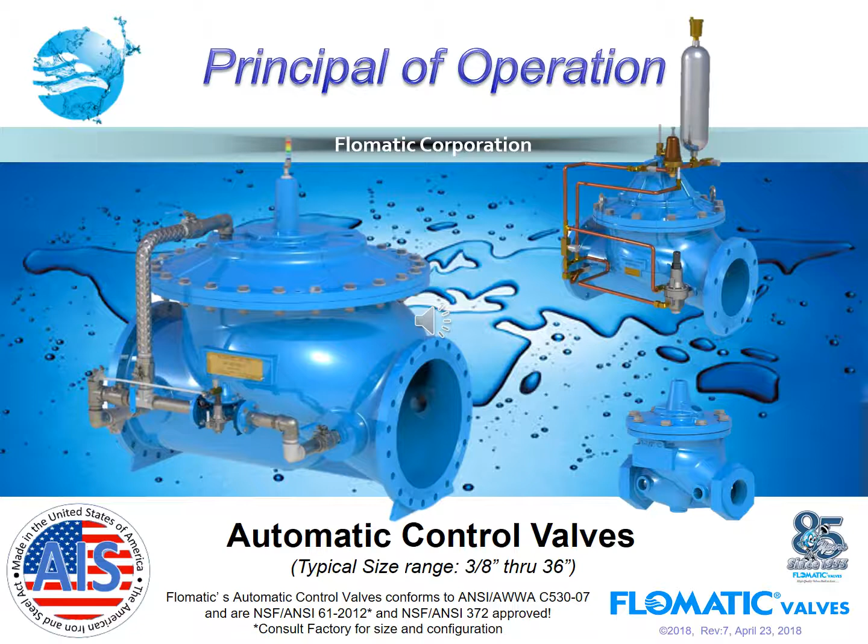Flomatic is very pleased to make this short presentation on our automatic control valve program, which is NSF ANSI 61 certified and also qualified under the American Iron and Steel Act, the AIS.

This short 15-slide presentation will explain how an automatic control valve works and what the component parts are.

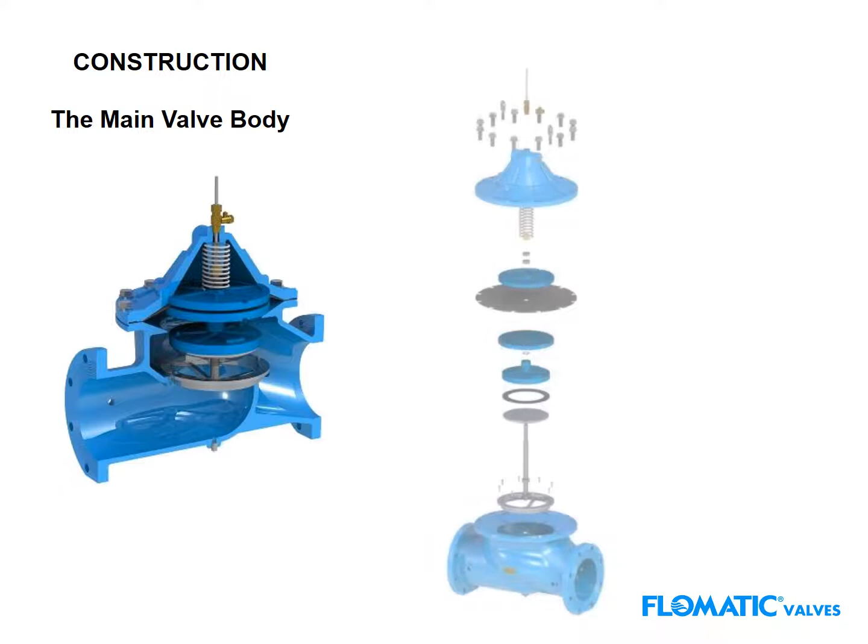The Flomatic automatic control valve has a very simple, reliable construction. It contains very few parts: top cap, spring, diaphragm plate, diaphragm, lower diaphragm plate, spool piece, rubber valve seal, valve stem, valve seat, and a fusion epoxy valve body.

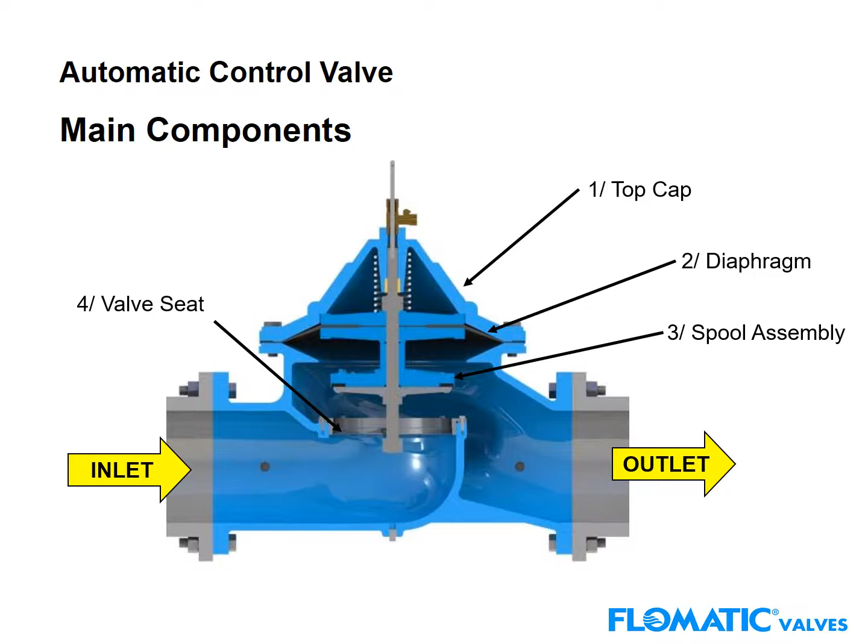That meets NSF epoxy requirements. The main components of the valve are an inlet portion and an outlet portion, a top cap or power chamber, and the diaphragm that separates the top cap from the main valve body, a spool piece that moves up and down, a stainless steel seat, and the main valve body.

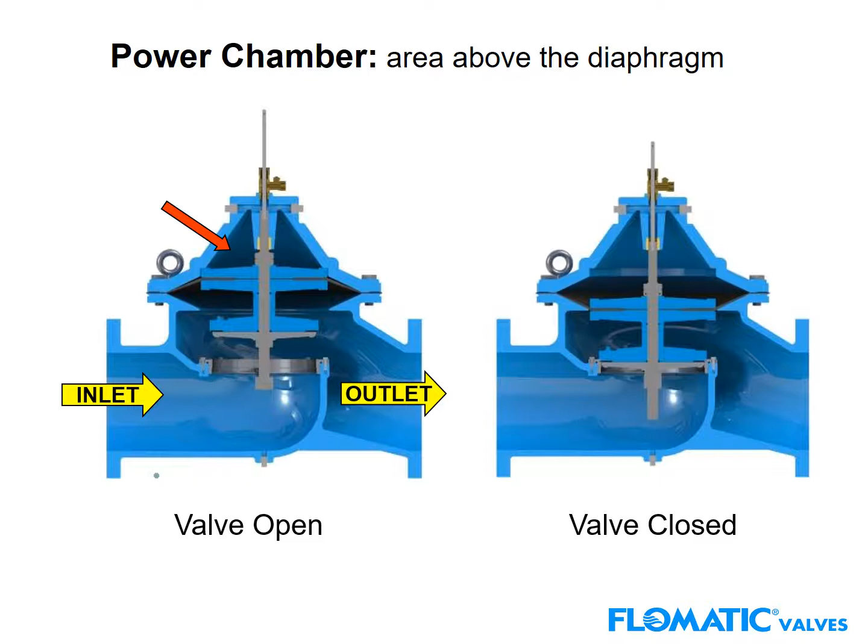Here is an explanation of how the valve's power chamber works in opening and closing the valve. In fully open position, the spool piece moves all the way up and there is no pressure in the power chamber, as shown by the red arrow. When the valve closes and there is no flow through the valve, the power chamber is pressurized and the spool piece moves down and seals off the flow.

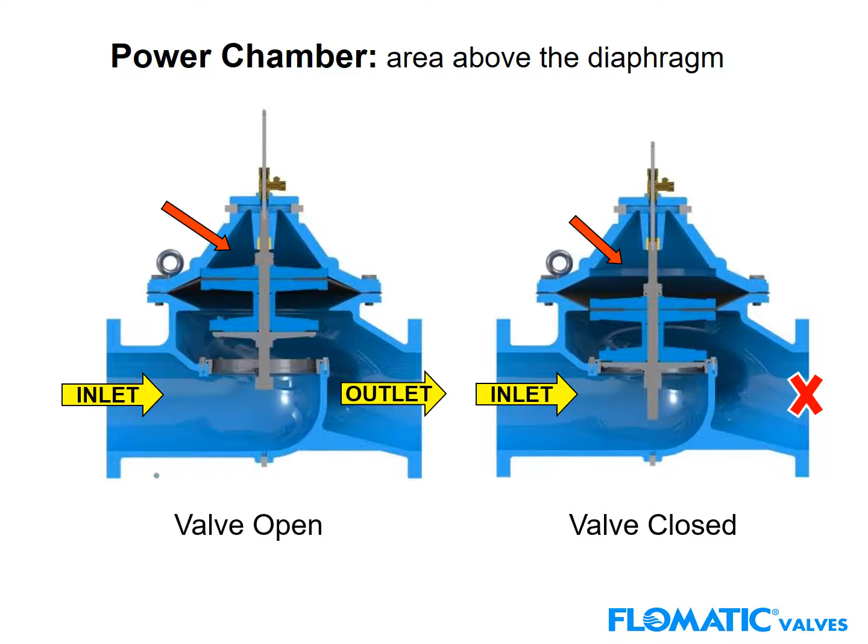Hydraulic principle of operation, Scenario 1: with the cover chamber vented to the atmosphere, the valve will open from the line pressure. The flow direction comes in from the left through the valve to the right, and the power chamber, shown in red, has no pressure as it is vented to the atmosphere. The spool piece moves all the way up.

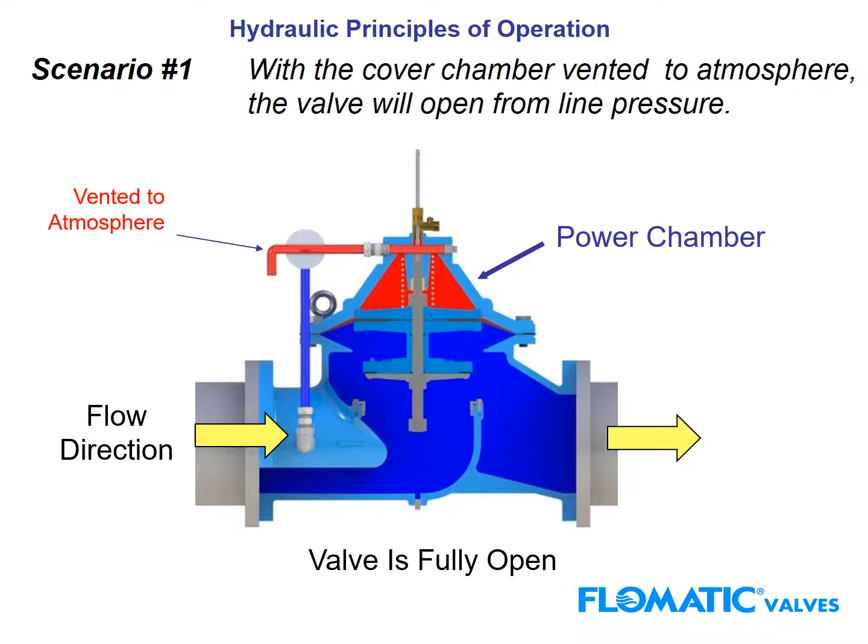Scenario number 2: if the inlet pressure is connected to the top power chamber, the valve will go closed. If we connect the inlet to the upstream pressure connected to the power chamber, and the line pressure is 100 psi, the power chamber will also see 100 psi, and the valve will go closed with no flow. The reason for this is that the diaphragm area is much larger than the valve seat or orifice.

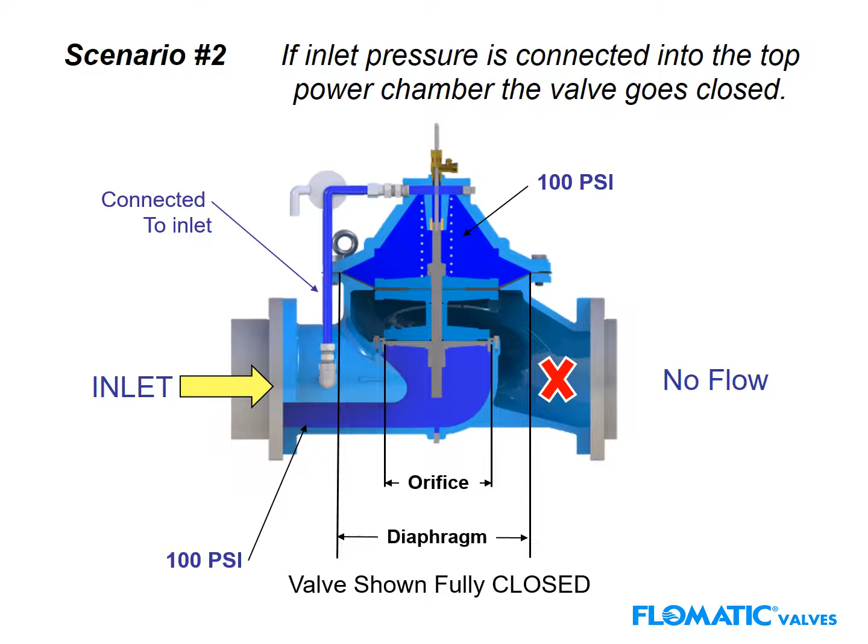So you have a hydraulic advantage. Let's explain the hydraulic advantages in Scenario 2. If inlet pressure is connected into the cover chamber, the valve closes tightly. In this example of a 6-inch size control valve, the diaphragm area, which is approximately 11 3/4 inch in diameter, has a surface area of 108 square inches.

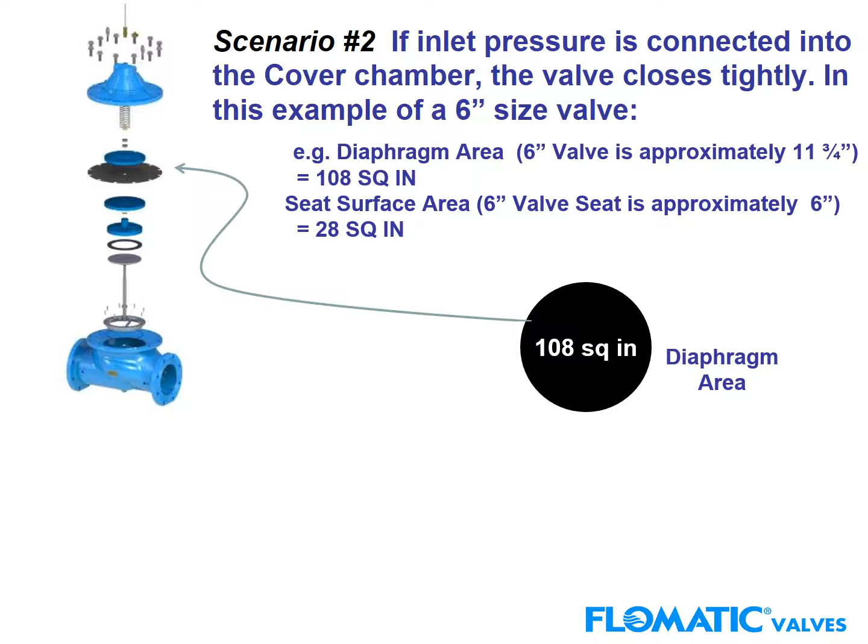On the other hand, the seat surface area on a 6-inch control valve is 28 square inches. If the inlet pressure is 100 psi, we multiply the pressure in psi times the surface area in square inches and get the force in pounds. The closing force, 100 psi on the diaphragm area of 108 square inches, gives us a closing force of 10,800 pounds.

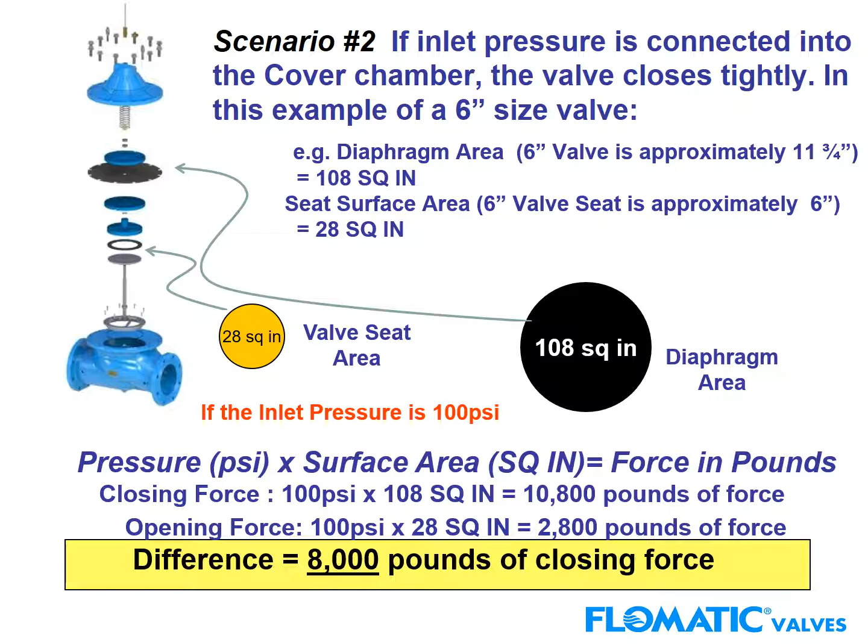Opening force on the seat area is 100 psi times the valve seat area of 28 square inches, giving us only 2,800 pounds of force. The difference is 8,000 pounds, the very convincing closing force of the valve.

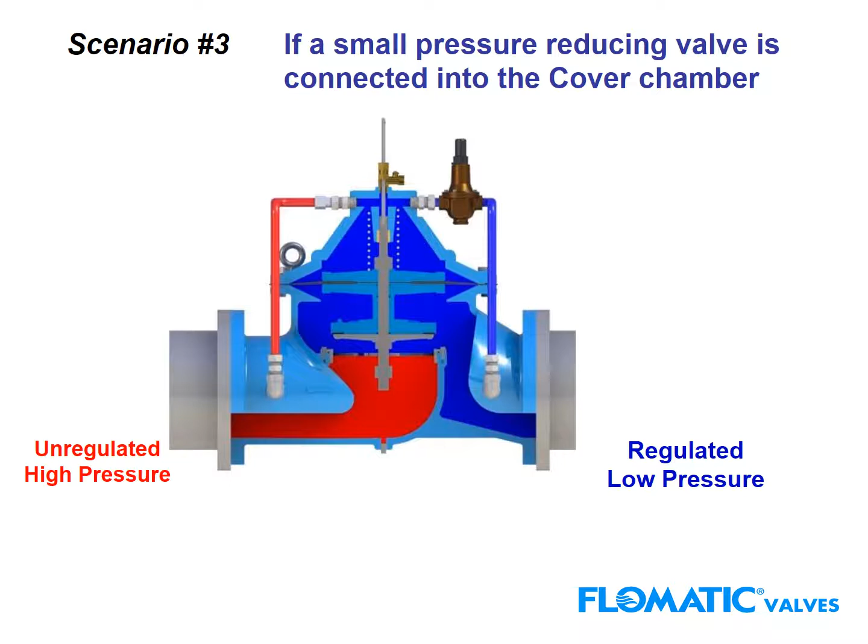In Scenario 2, we explained the hydraulic relationship that makes the valve fully open or fully closed. In Scenario 3, we'll explore this relationship to a higher level as follows.

If a small pressure reducing valve is connected to the cover chamber, in this case a pressure regulating pilot, we have a high unregulated pressure upstream and want to regulate it to a lower constant downstream pressure. Knowing the hydraulic relationship, we install the pilot valve, a pressure regulating valve, connected from the top cover chamber of the valve to the outlet downstream.

The pilot valve is adjusted, in our case, to 50 psi, while the inlet could be fluctuating, let's say, between 90 to 125 psi.

To make this control valve work properly, we need a flow restrictor, an orifice valve, on the inlet. Why? The inlet or upstream pressure is higher than the valve's outlet pressure, causing water to flow into the cover chamber faster than the pilot valve's ability to take water out. This is needed to regulate the valve and modulate to a constant downstream pressure.

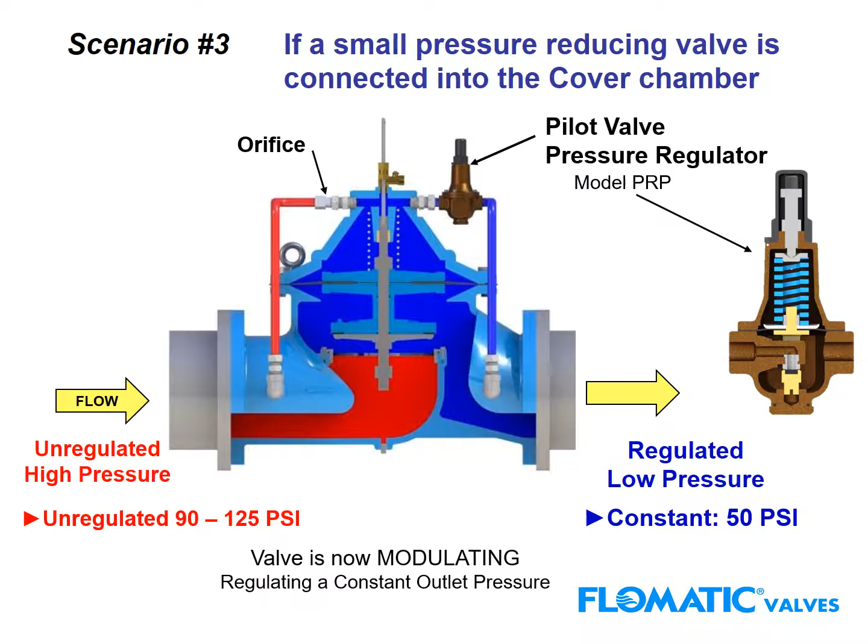In earlier slides, we explained the hydraulic advantage, the larger diaphragm diameter versus the diameter of the orifice. In most hydraulic control valves, the ratio is about 1 to 3.

However, the pilot valve has a much greater ratio of diaphragm to orifice, as it incorporates a very small orifice area, giving us a ratio of about 1 to 68, which makes that control valve operate with much more precise regulation than the main valve.

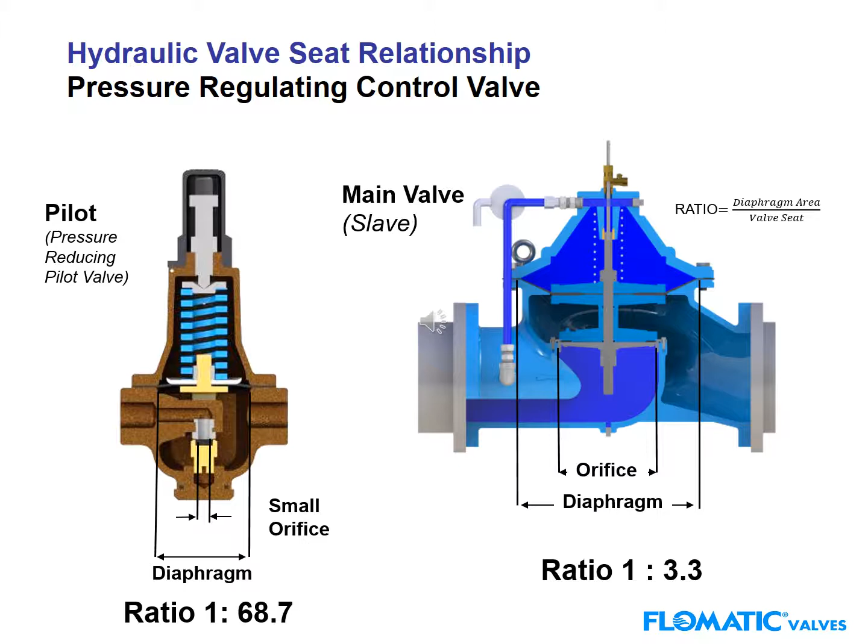And that's why the main valve is referred to as the slave, and the pressure reducing pilot as the pilot, giving the regulation accuracy to the automatic control valve. As we can determine from the previous slide, the pilot is very important in making the main control valve body operate.

Pilot controls can be hydraulic, electronic, solenoid, battery operated, or a combination of both hydraulic and electronic. Each manufacturer's products have unique characteristics and highly individualized installation, maintenance, and operation instructions that dictate the care and operation of the pilot control systems. There are many types of pilot control systems for diaphragm actuated valves, including but not limited to...

Perhaps the most common is the pressure reducing control valve, pressure relief valve, combination of pressure reducing and sustaining, etc., rate of flow, altitude, and remote sensing pilots.

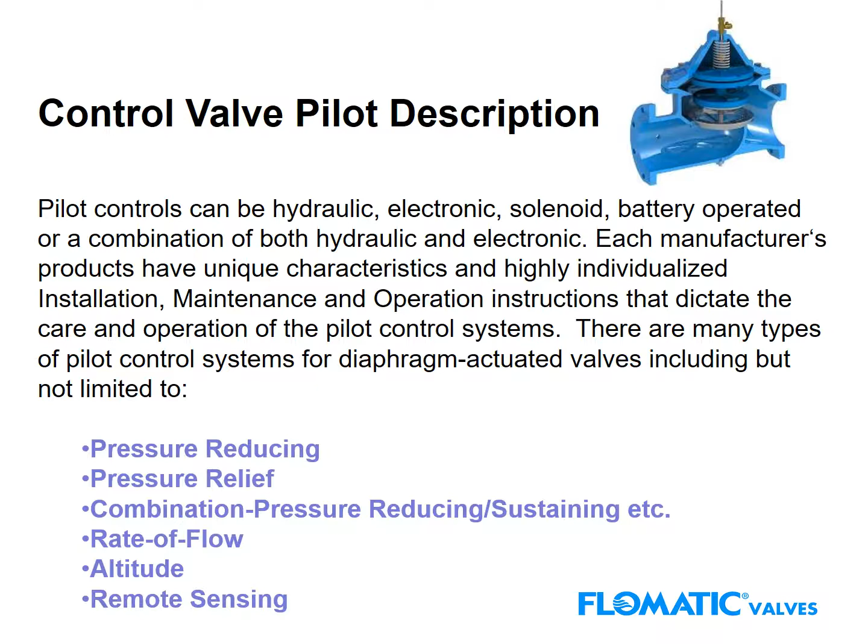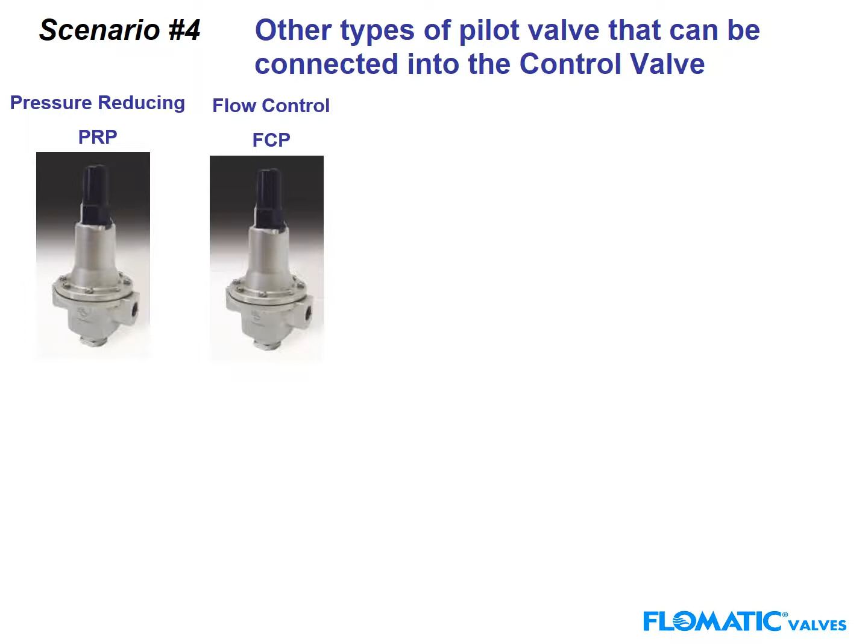Scenario 4. Other types of pilot valves that can be connected to the control valves include: pressure reducing pilot (PRP), flow control pilot (FCP), back pressure pilot (BPP), pressure differential pilot (PDP), accelerator pilot (ACP), solenoid valves 2, 3, or 4 way, modulating control valve pilots (AMP) or non-modulating (ANP), modulating float control valves (FMP), and finally non-modulating float pilot (FNP).

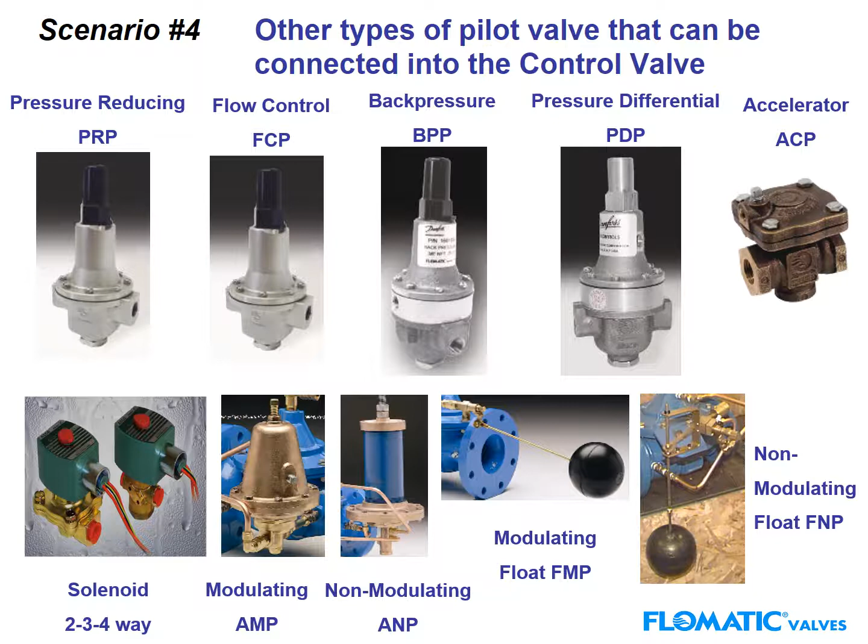We have discussed in detail the operation of the control valve and the various pilots. Here are some of the most common automatic control valve configurations.

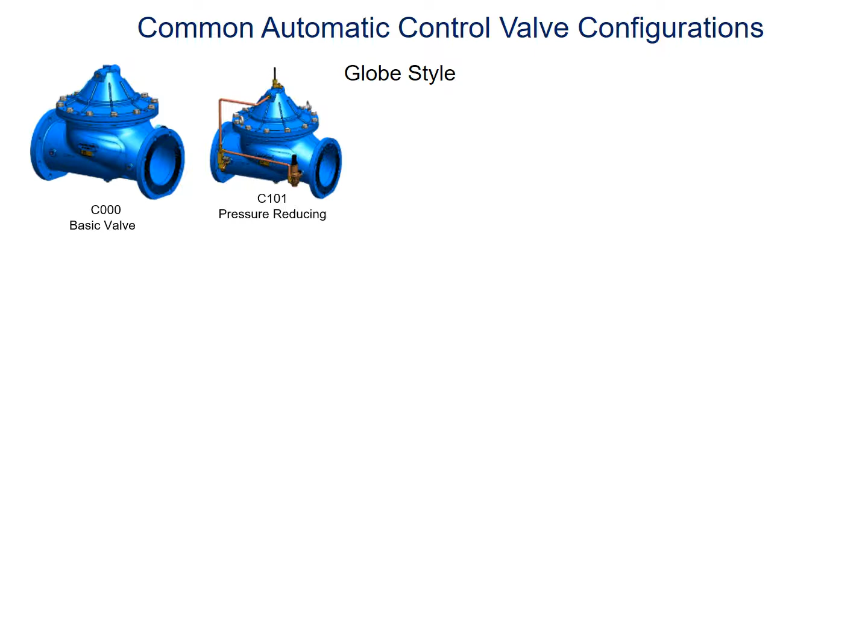The basic valve we call C000. Model C101, probably the most common valve, is the pressure reducing valve. The altitude valve is model C201, or the non-modulating model C205. Another popular control valve is the back pressure valve, model C301, followed by the pressure relief valve, also a very common valve, model C401.

Surge arrestor, to eliminate water hammer in long pipelines, is model C501. Then we have the pump control valve, model C601, or dual chamber 621. Float control valves: modulating model 701, and non-modulating model 705.

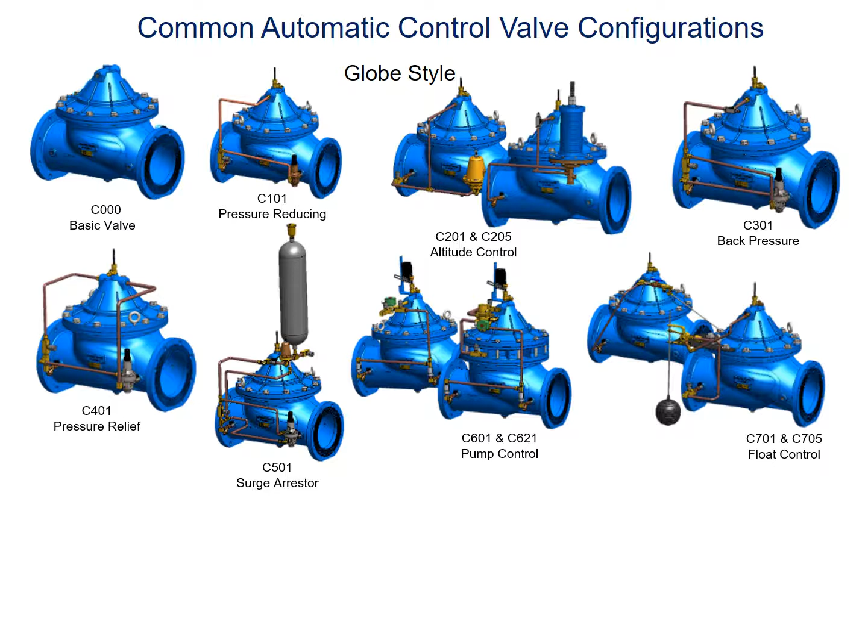Solenoid valve, model C801. Flow control valve, model C901. And finally, the hydraulic check, model C1001.

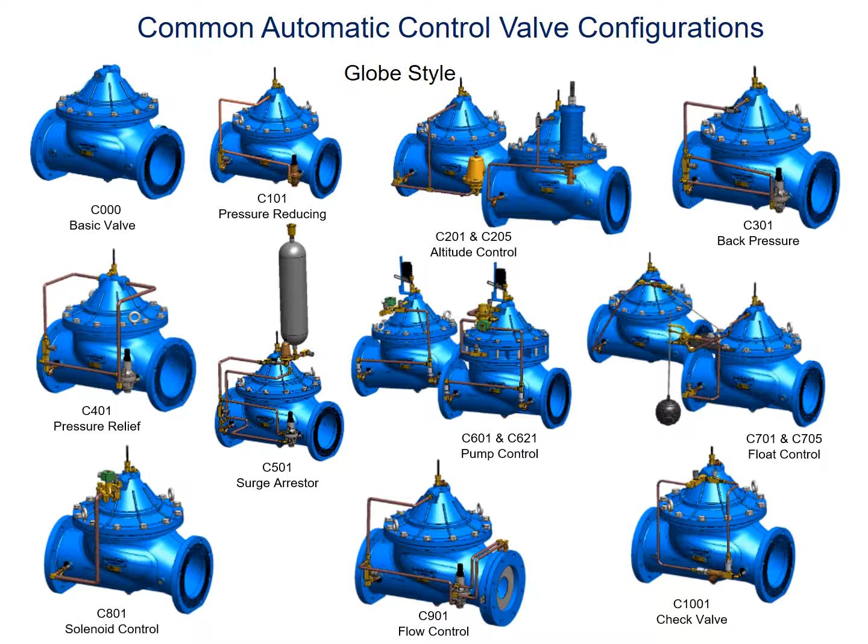In addition to the 10 most common automatic control valve configurations, there are many additional combinations under each product family.

For instance, the series C100 pressure reducing control valve has additional features of dual pilots for additional flow and speed.

Another very popular combination is our C103, pressure reducing with external check, often used for booster pump systems. Back pressure combined with a pressure reducing valve is commonly used with pump systems and line shaft turbines, to ensure that a well, for instance, or a tank is not pumped empty, and the back pressure feature ensures that the pump does not overdraft the supply.

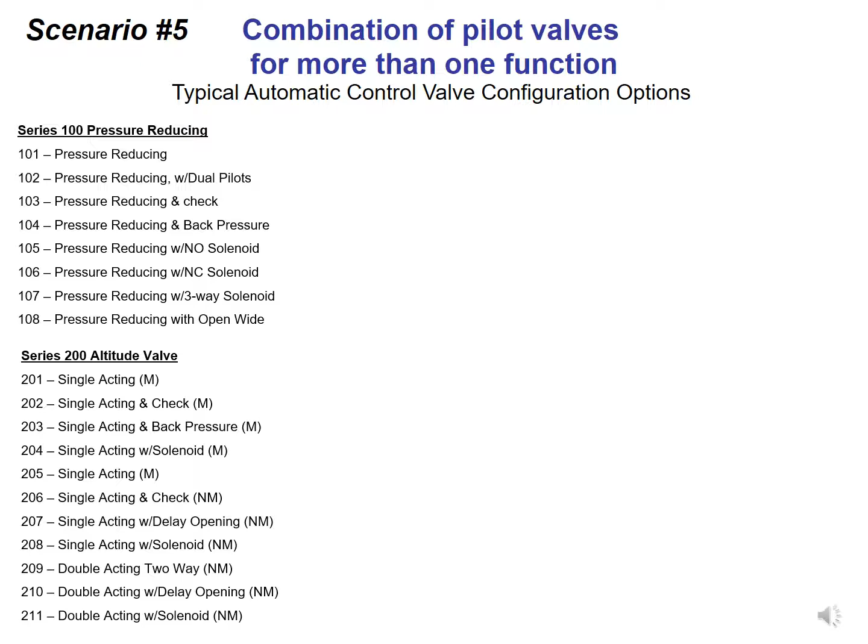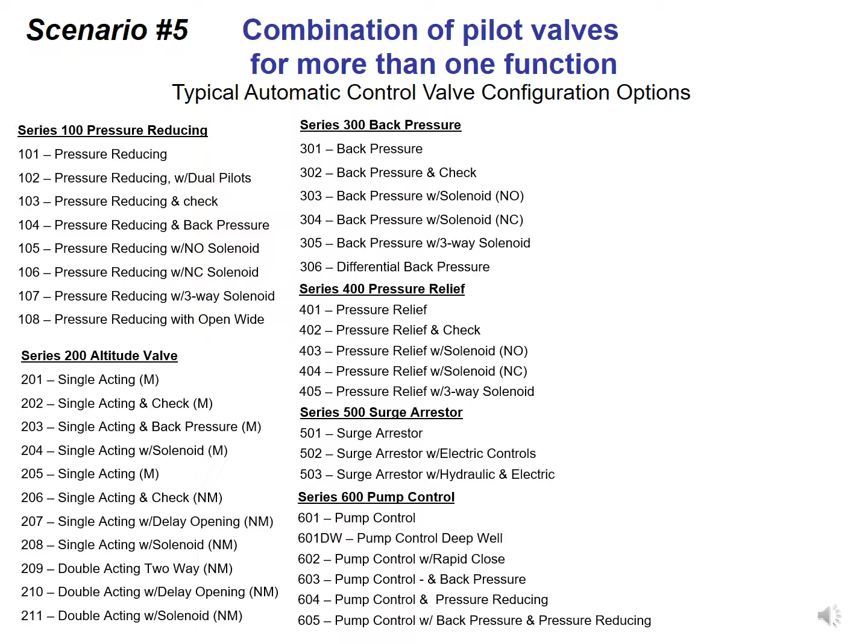There is also pressure reducing with a normally open or normally closed electric solenoid. In addition to these combinations, we have similar combinations for the Series 200 altitude valves, Series 300 back pressure, Series 400 pressure relief valve, Series 500 surge arrestor, Series 600 pump control valve, Series 700 float valve, Series 800 solenoid valve, and Series 900 flow control valve, in addition to the Series 1000 hydraulic check.

As you can see, there is almost an unlimited combination of pilot controls for the hydraulic control valves. You will find more on the Flomatic webpage.